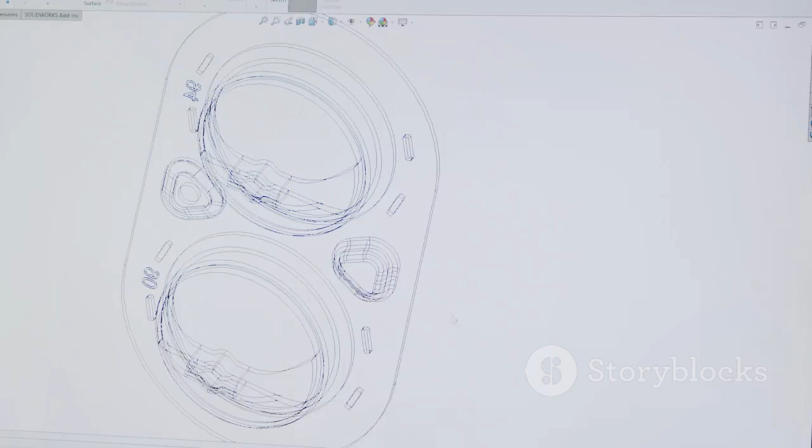Ever tried to fit a long part, like a metal rod or a bridge beam, onto a standard drawing sheet? It either shrinks to a dot or needs a paper roll a mile long. This is a classic engineering problem, showing big ideas in small spaces. The solution? Breaking and interruption.

These tricks let you skip the boring, repetitive middle and focus on the important ends. It's not cheating, it's smart communication. By using breaks, your drawings become cleaner, easier to read, and more professional.

Imagine drawing a 10-meter pipe. The middle is just pipe. A break lets you show the ends and skip the endless straight line. This saves space and highlights what matters. A clear drawing means fewer mistakes and better builds.

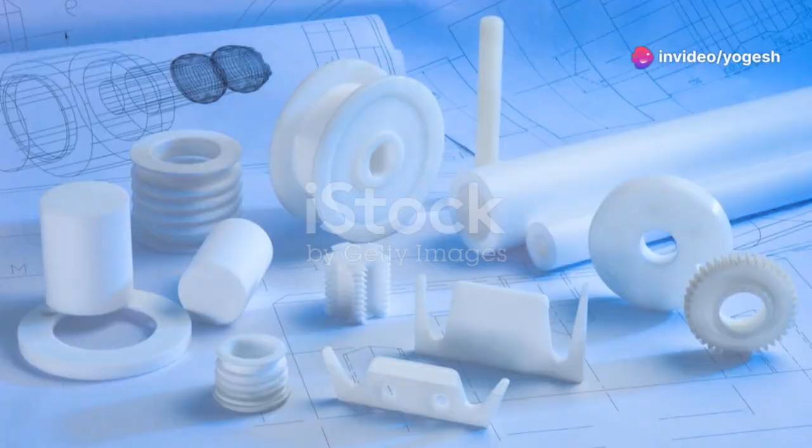Good drawings tell a story. If it's confusing, things go wrong. Mastering breaks and interruptions isn't just about pretty pictures. It's about making sure your ideas are built right every time. Let's see how it works.

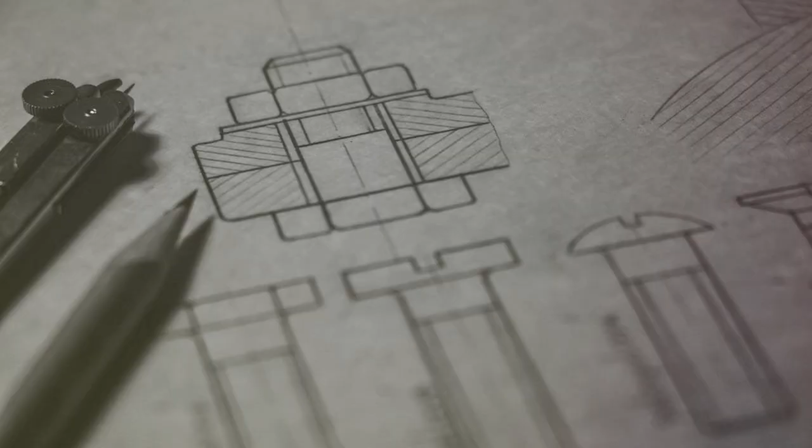So, what are these space-saving techniques? First, the break for long, uniform parts like shafts or rods. You chop out the middle and use break lines to show it's longer than it looks. Example: a curtain rod with fancy ends. Draw the ends, add jagged break lines, and label the true length.

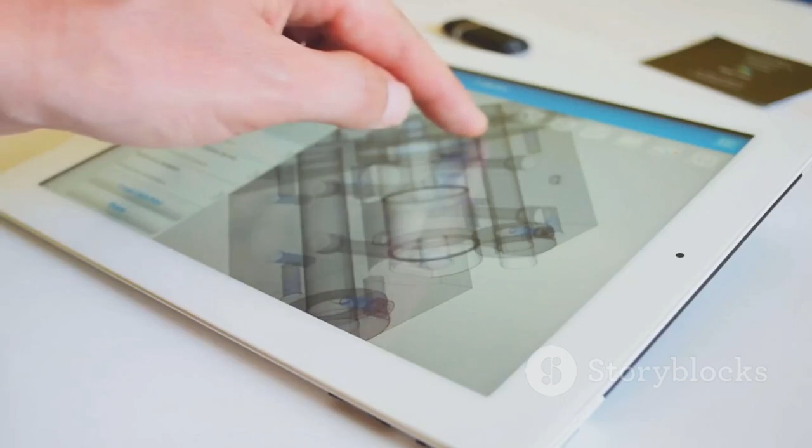Interruption is different. It's for showing a partial view, like a window into a part, to reveal internal features. Use a wavy line to create a boundary, then show the inside details just in that area. Think of a car engine. Instead of a full cross-section, interrupt just one cylinder to show its details.

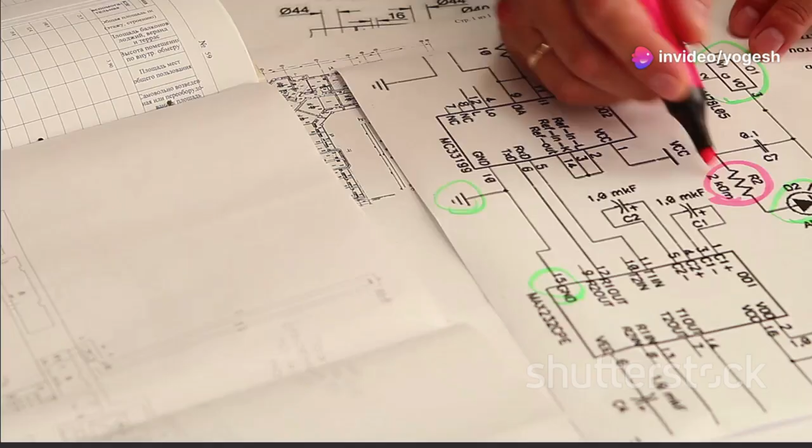Both methods keep your drawing focused and clear. Breaks skip the boring middle. Interruptions spotlight the important inside. That's how you make complex parts easy to understand.

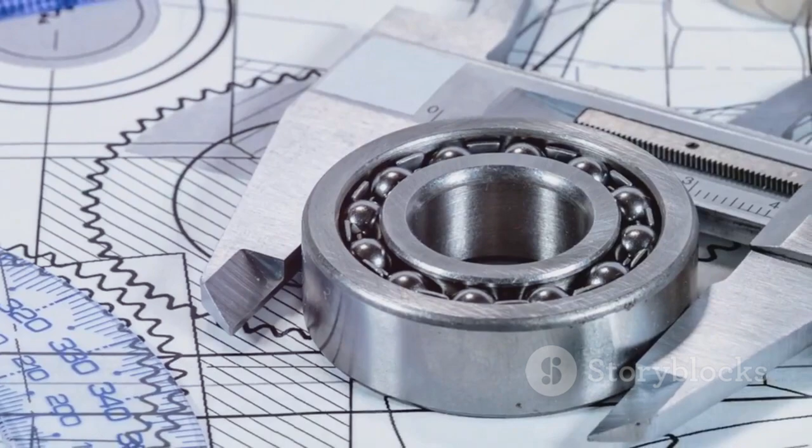Break lines come in different styles for different jobs. The short break line, a thick, wavy line, is great for small areas or interrupted views. For long, round parts like shafts, use the S-break, a stylized S through the part. For rectangular parts, use a jagged zigzag, like a lightning bolt.

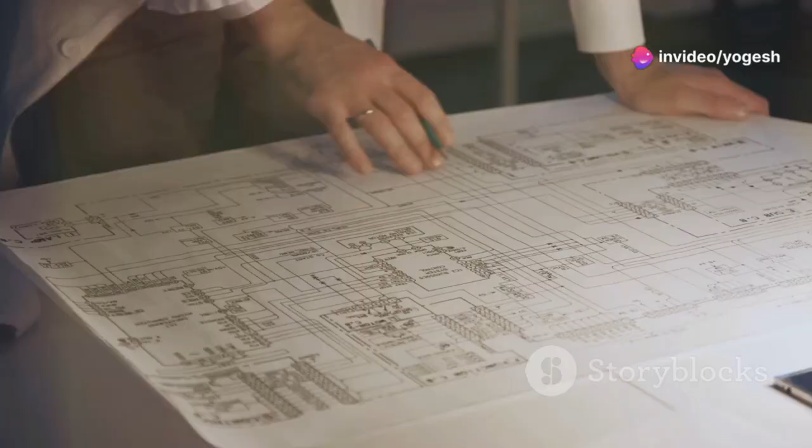Offset breaks are for section views that need to jog around features, letting you show more in one view. Full view breaks shorten the whole part. Partial interruptions just peel back a small area to reveal hidden features. Use the right break for the right shape. Each one makes your drawing clearer.

The goal is always the same: less clutter, more clarity. Pick the right break and your drawing tells the story at a glance. That's the pro move.

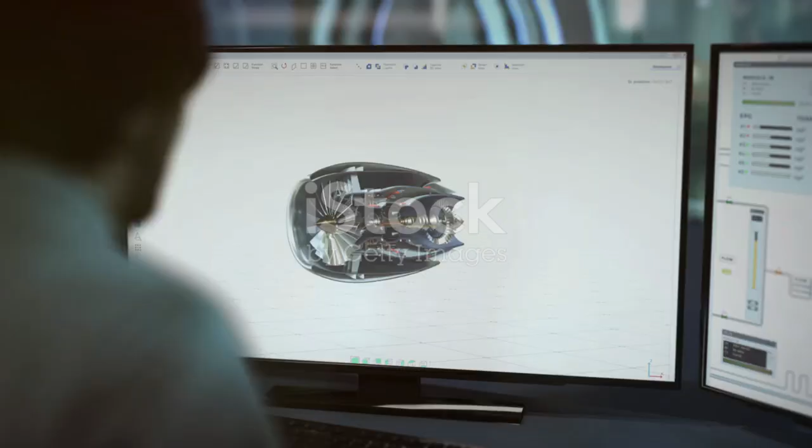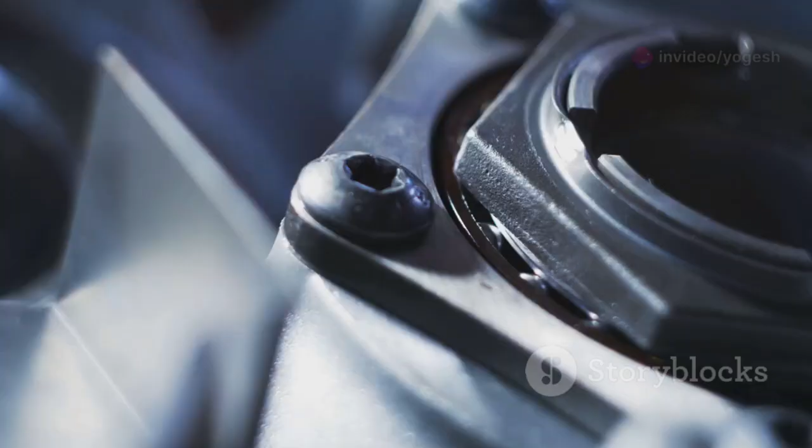Let's break a long steel shaft step by step. First, decide where to break. Skip the uniform middle, keep the detailed ends. Draw one end with its features. Add the first S-break line across the shaft. Leave a gap, then draw the other end with its features. Add the second S-break line.

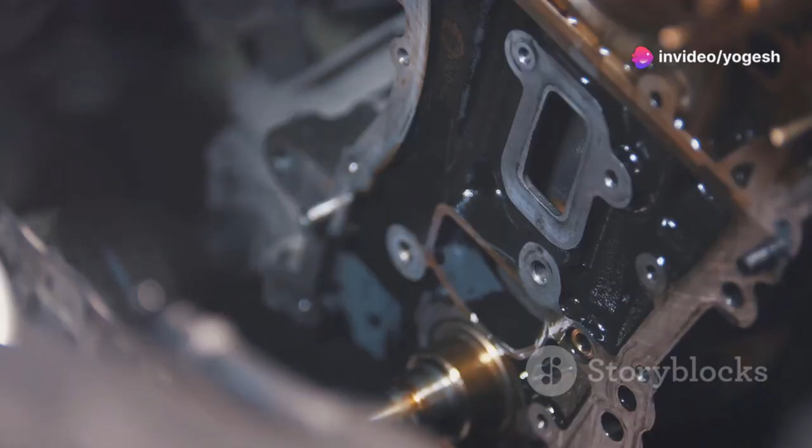Now, dimension the full, real length from tip to tip, even though the drawing is much shorter. The drawing is compact, but the dimension tells the truth. Use your CAD's break tool to save time. That's how you fit a 10-meter shaft on a single page, accurately.

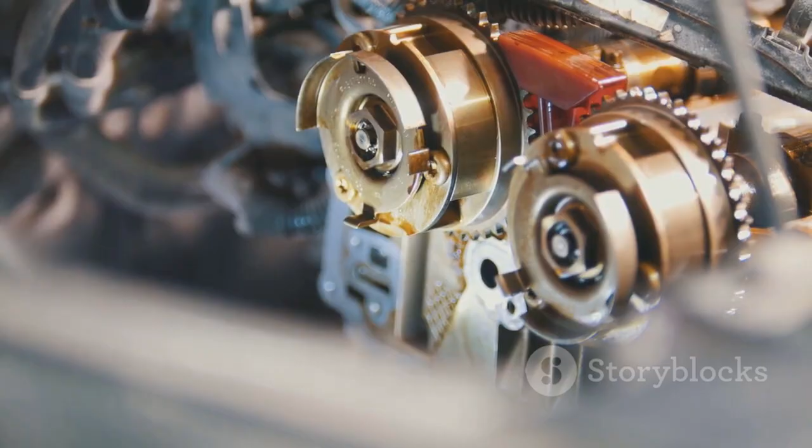Breaks and interruptions are everywhere. Beams, drive shafts, pipes. Without them, engineering drawings would be unreadable. Breaks let you focus on connection details and cross-sections, not endless lines. But beware. Never dimension the broken length, always show the true size.

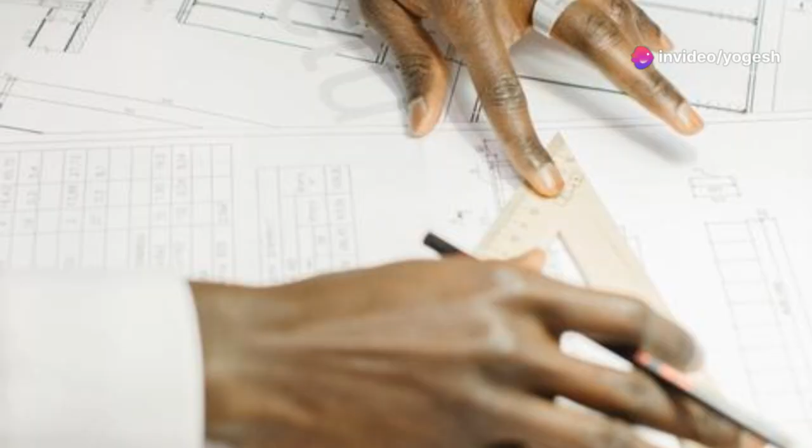Use the right break line for the part's shape. S-break for round, zigzag for square. Don't break through important features, only remove uniform sections. And don't add breaks just for fun, only when needed.

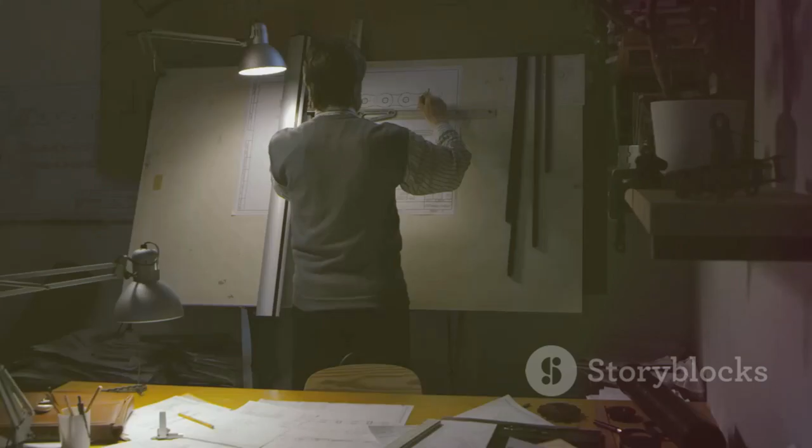Master these, and your drawings will be clear, professional, and mistake-free. It's a small skill with a huge impact. So go ahead, start breaking things the right way. That's how you draw like a pro.